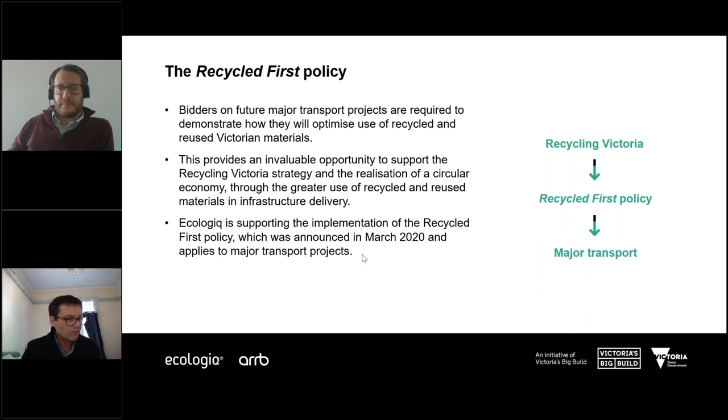Thanks, Tony. Right, so my name's James Grenfell, and I'm Principal Professional at ARRB within the Sustainability and Resilience team. And as the next part of this webinar, I'm going to be going through some of the properties and applications of recycled crushed glass. And then afterwards, I'll be handing back again to Tony to go through a couple of case studies.

So the issue that we're trying to deal with here is the quite large amount of glass that Australia generates each year through glass packaging. So typically Australia uses somewhere in the region of 1.2 to 1.4 million tonnes of glass packaging a year. A large proportion of this either goes to landfill or into storage.

Reprocessing currently is less commercially viable. If we were to consider just Victoria, Victoria is currently generating around 250,000 tonnes of waste glass annually, of which 76% is recovered, and half of that becomes glass cullet.

So where does all this glass come from? A lot of the glass comes from our curbside waste collection, so in our recycling bins. If we were to consider the whole of Australia, around 56% of it is recycled. So we're actually doing a bit better than average in Victoria.

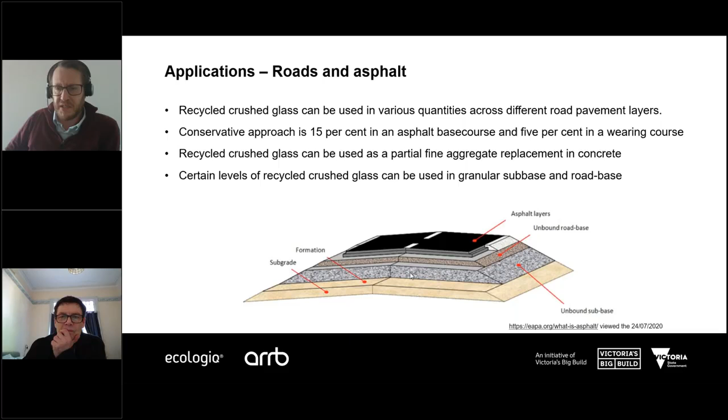Also, as part of road infrastructure, there's a number of other applications where recycled crushed glass can also help us. So we could also be looking at using recycled crushed glass as a bedding sand replacement. There's the option to use it in drainage applications. Also, it could be used in embankment fill and in landscaping. So there's a number of different areas across the road reserve where we could consider using recycled crushed glass.

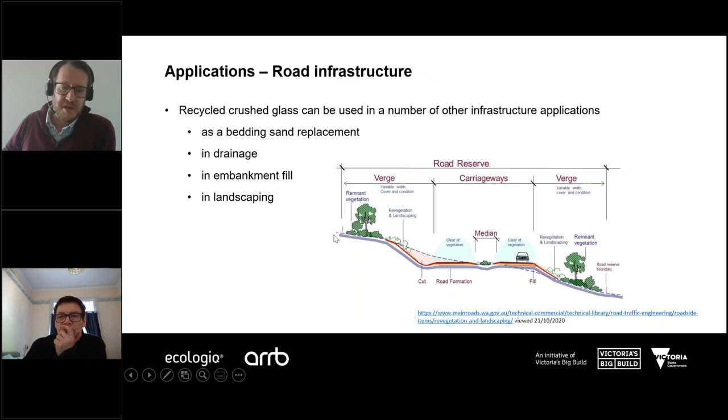So now I'm just going to move on to asphalt. And again, there's options to substitute for various sizes of fine and coarse aggregate within hot mix asphalt. As I alluded to before, typically we would be considering a sub 4.75mm size product, and this product is crushed to give it a continuous grading, and therefore is used as the fine aggregate replacement.

We need to bear in mind its shape. It's important to be crushing it to gain a fairly homogeneous shape for our crushed glass, which is again one of the reasons why we're typically crushing to 4.75mm or below. So if you were to consider, say, the wall of a glass jar, typically that might be in the region of 5mm thickness. Therefore, if we crush our product to below that size, we get fairly homogeneous size dimensions in all directions, and that's particularly important. We don't want to have flaky particle shapes, because those can then be detrimental to the resultant properties of the asphalt mixture.

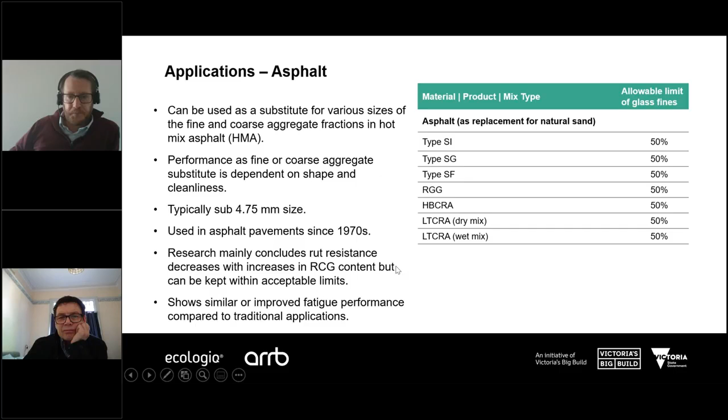The next topic I'm going to talk about is concrete. Glass cullet can be used as a replacement for the fine aggregate in concrete applications. In both asphalt and concrete, recycled crushed glass can be particularly useful to mitigate against the lack of natural sand. In certain areas in Australia, there's a lack of the sand size portion of aggregates, and by incorporating recycled crushed glass we can counteract that lack of natural product, reduce the amount of virgin aggregate that needs to be mined, and reduce the distance that materials need to be hauled if we've got local recycled crushed glass stockpiles.

One of the advantages to using recycled crushed glass in concrete has been the observed reduction in drying shrinkage. The incorporation of recycled crushed glass has been shown to reduce the drying shrinkage, which is particularly advantageous for the use of concrete.

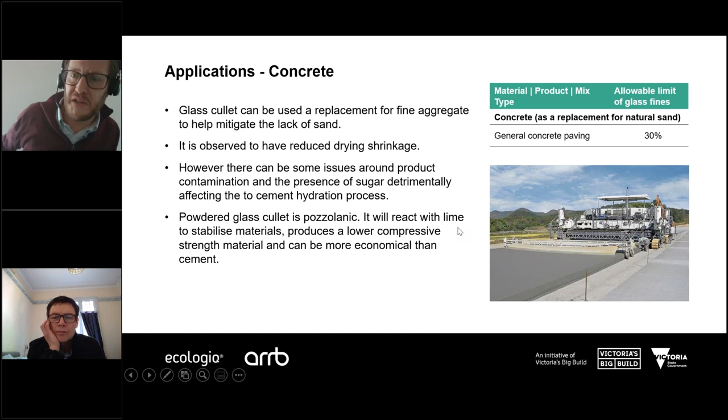Another note about recycled crushed glass is that if it's processed to a fine enough powder, it actually has some pozzolanic properties, which means that it can react with lime to stabilize materials. It would then produce a lower compressive strength material than using cement alone, which potentially has some advantages in some applications, and it can also be more economical than cement. In terms of general concrete paving, at the moment in Victoria we're allowed to replace up to 30% of the fine aggregate with glass fines.

So now if we move on to granular materials. As I mentioned, there's the option to use recycled crushed glass in both base course and sub-base layers on sealed roads. In terms of granular sub-base and granular base course, we don't have to be so concerned about the cleanliness. We wouldn't really want to be using dirty glass in unsealed roads, because that can potentially lead to some leachate issues.

But if we're considering sprayed sealed roads, there are certain acceptable limits on the amount of recycled crushed glass that can be used in different classes of crushed rock as supplementary materials. Those allowable limits reduce as we move up through the classes, from the lower quality class 4 material, where we could allow up to 50% supplementary materials or glass fines, through to a class 1 crushed rock where we couldn't accept any more than 5%.

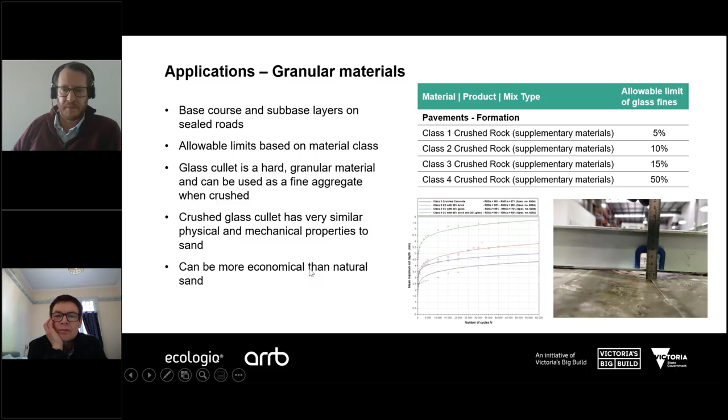Other applications where we could be using recycled crushed glass include fill and bedding materials. So we could be using them for bedding and backfilling around underground pipes, cables and conduits, etc. There's also the option to use recycled crushed glass as a bedding material for block paved pavements and footpaths, and there's also some options to use it as top dressing and turf underlay.

So again, there's some guidance and rules around bedding materials and backfill materials. So typically our bedding materials would have 100% material passing 19mm sieve size, and still be a graded product with 5 to 40% allowable passing the 0.075mm sieve size, so the 75 micron sieve. And again, there's some fairly similar rules around backfill materials. This material is allowed to be a bit coarser than bedding materials, but again, it's fairly similar rules.

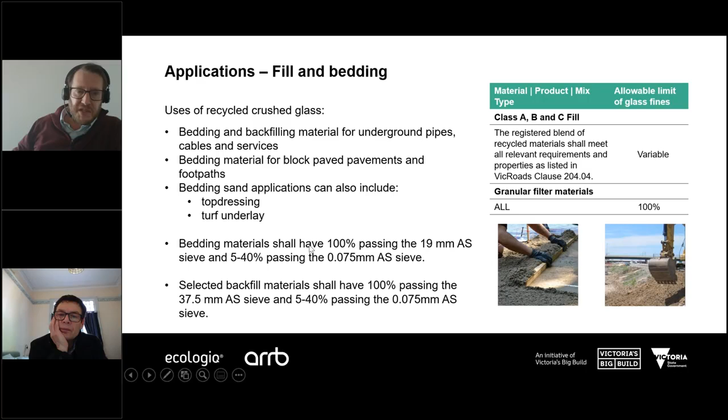Other applications that I mentioned before include embankment fill, also as drainage layers and in landscaping. So embankment fill, you would think, represents a very large opportunity to use recycled crushed glass due to the sheer volumes of material that are used in those applications.

We've seen recently that there's been a number of local government entities that have been introducing recycled crushed glass as drainage layers within their pavement structures. So typically they've been screening their recycled crushed glass product, so taking a product that would be within 2 to 4.75 millimeters, which is seen to be free draining, and allows us to produce drainage layers which could be used potentially above the subgrade in the pavement structure.

Again, we need to be mindful of the source of our glass product. So we don't want to include any glass from ceramics or cathode ray tubes or fluorescent light fittings or even laboratory glassware. So that's again down to potential contaminants and the issues around leachates.

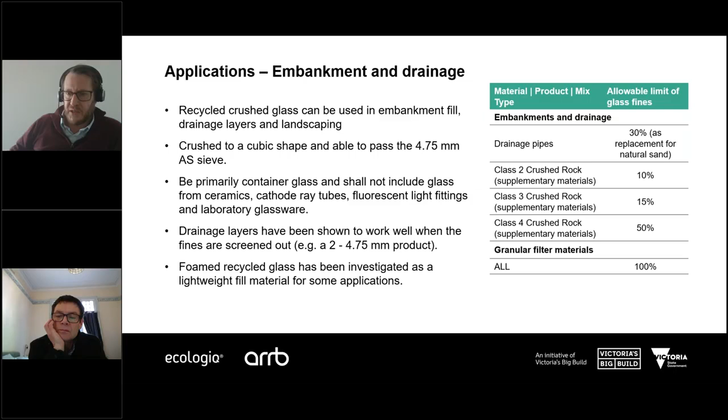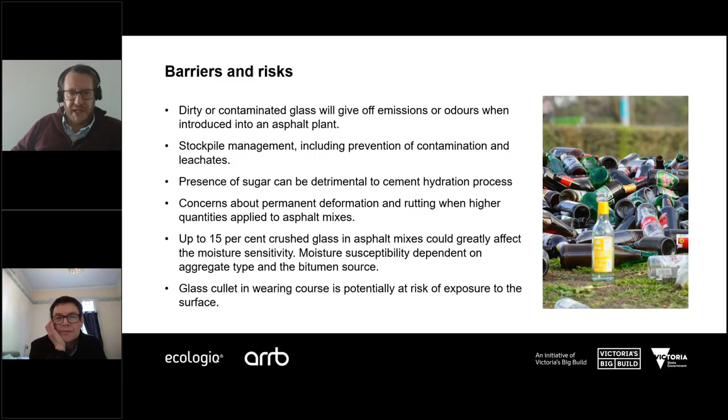So in terms of opportunities for incorporating more recycled crushed glass into our road infrastructure, there are a lot of improved specifications for each application that are being developed at the moment, which will allow us to have more understanding of both the levels of recycled crushed glass that we could be incorporating, but also the processing that would be most applicable for that end application. So in terms of particle sizes, whether or not it's required to be cleaned, those types of things. So specifications are at the moment being further developed to give more advice and guidance.

It's likely that these guidelines and specifications will be very end application specific. So again, as I mentioned before, if we were to be including glass as a drainage layer, typically we might be screening the product that's 2 mil to 4.75 mil, that would be very useful for drainage products. Again, potentially that's then giving an opportunity to have a finer size product, a 2 mil minus product that could potentially be more useful in wearing courses to prevent the potential for the larger glass sizes plucking out of wearing course surfaces.

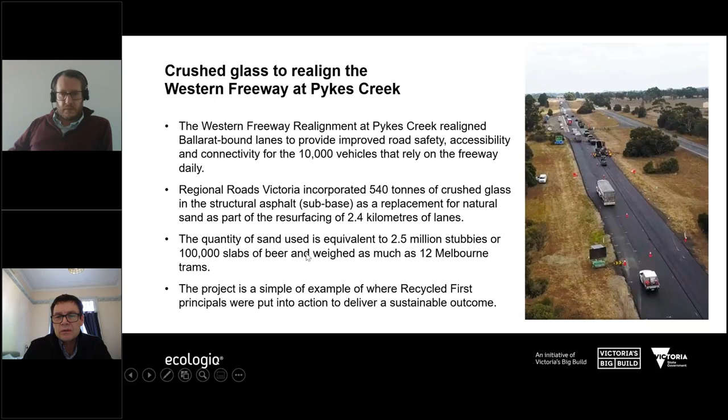I want to talk about level crossing removal. So looking at a rail example, the Level Crossing Removal Program have been early adopters, I think, of using recycled crushed glass, and are to be commended for the success they've achieved in taking this idea forward.

So at Williamstown North, a new level crossing project in 2018, some new rail bridges were built over Kororoit Creek Road. It used about 900 tonnes of glass sand material as bedding fill for combined service routes and for backfill for drainage piping, some of the applications that James spoke about earlier. Interestingly, and worth highlighting here, that product actually provided a significant cost saving to the project, around half the price of virgin sand, which is pretty significant, along with diverting a significant amount of material from landfill.

And I think that's the perfect scenario where sustainable outcomes are achieved and cost benefits are also realised at the same time. So great success. And importantly, this project has led to a uniform Metro Trains Melbourne spec for the application of glass sand, so it can be applied without requiring approval in future in these sorts of applications. It's a great example of that intentional, deliberate approach to creating a BAU way of delivering transport infrastructure into the future. So it's highly commendable and a great example of the success that we can have with these sorts of materials. And again, I take my hat off to that team at Level Crossing. So there are two examples.